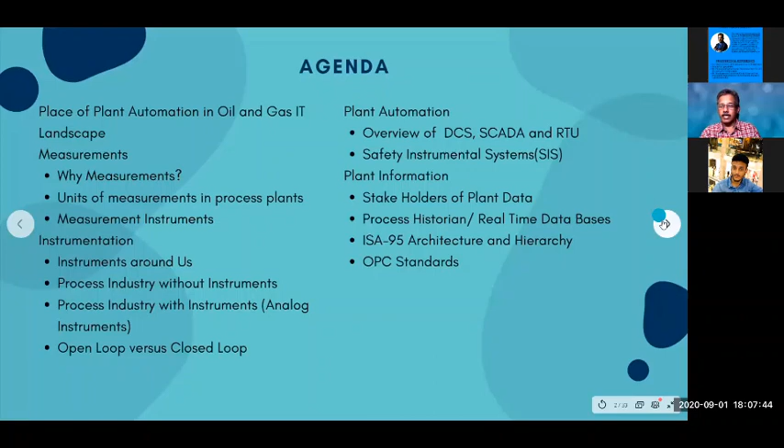I will also cover the overview of DCS, SCADA system, safety instrumented system, and another important layer called the plant information system. So this is how I have divided my session today. That is going to be the agenda. If you see this landscape here, this is predominantly what we are going to cover in the next 7 days.

So the entire IT landscape is divided into 5 major layers. The bottommost layer is known as the plant automation layer. It comprises of control room automation, field instrumentation, plant automation systems like DCS, SCADA, or even today's mobility solutions for field automation.

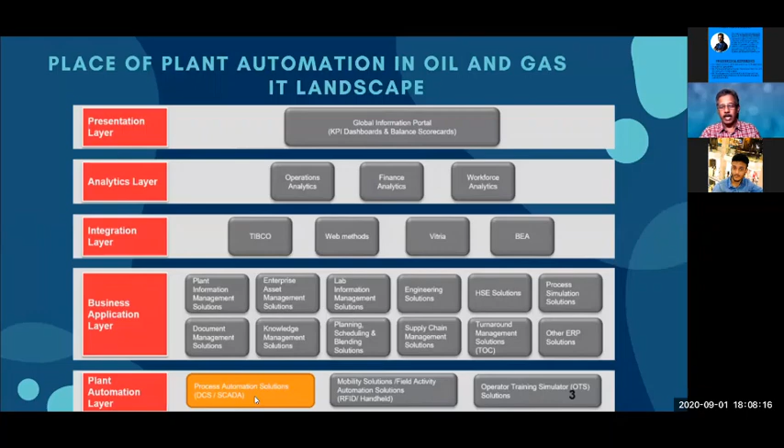Then the next level is known as the business application layer. These are generally data specific applications like asset management solution, plant information system, lab information system. They are all more specific to database kind of applications, whereas plant automation system is totally a different animal.

Then we have the third layer where we are trying to integrate all these applications with the help of tools called TIBCO, Web Methods, Vitria, etc.

And then we move on to the analytics layer where the business head, for example, the HR guy, will be doing workforce related analysis. How many people are chemical engineers? How many mechanical engineers? How many welders are there? How many certified welders are there?

This kind of analytics. Or when you talk about operation analytics, where exactly am I losing money? Which plant is giving me the maximum profitability? Or finance related analytics - what is the cash flow, what is the budget available, how much money I have spent. So all that kind of analytics is happening at a unit level.

But the final layer is the business portal or the key KPI dashboard. That is where the GMs, director operations, will not be bothered about the plant temperature, pressure - generally those things are taken care of by the technical process engineers. But the top management will be more interested in knowing the crude throughput, how much more profit you are generating, what is the availability of the equipment in the plant. So they are seeing these kind of KPI.

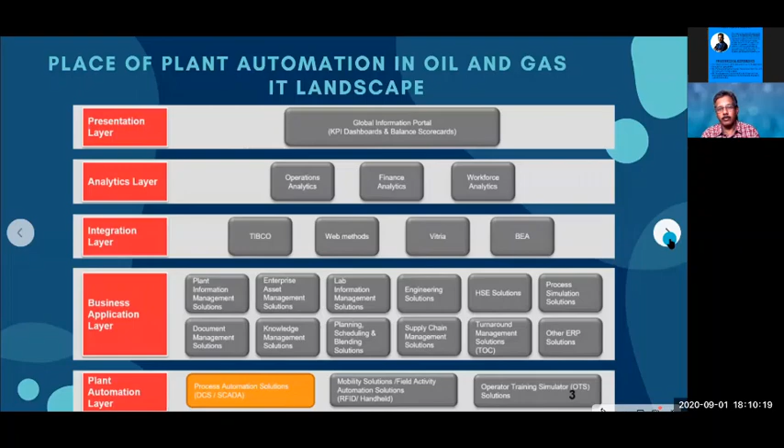So now we'll start with measurements. In a plant, we have pressure, temperature, flow, level - several parameters are measured, and to measure that we use instrumentation. Before getting into instrumentation, I'm going to talk about measurements. Can you all type in what kind of measurements you have come across in our day-to-day life?

In terms of health, what are all the different kinds of measurements we have? Personal health.

I just want to set the context before jumping into the jargons and terminologies. So we have 45 people and only one person has responded. I want you people to switch on your video and interact. If that is not possible, at least type in and respond to my questions. Otherwise this will be like a monologue and it will be boring.

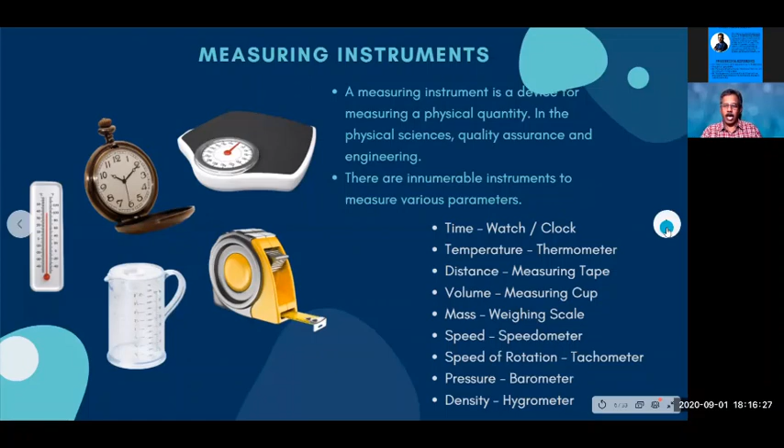And these instruments are available in our own house. For example, you have a fan regulator. Then in your bathroom you have a thermostat, which adjusts the temperature of your hot water. Then if you have old parents, many of your parents may be using a glucometer, right? Glucometer is to measure the sugar level in the blood.

Then when you call an electrical technician to attend some electrical issue, he comes with a multimeter to check the connectivity and measure different parameters. Then we have odometer, speedometer, the oil level gauge in your two-wheeler or car dashboard. To measure your car tire pressure, you use a small pressure gauge, either at your own garage or at the air filling station. Then your fridge has the thermostat, viscometer - that's good.

But when we come to process parameters - not only with respect to a refinery, but petrochemical plant, gas plant, any process plant - there are 4 parameters which are very important. These 4 parameters determine the entire operation and finally the quantity and quality of your end products. So what are these 4 parameters? Number 1: flow, temperature, pressure, and level.

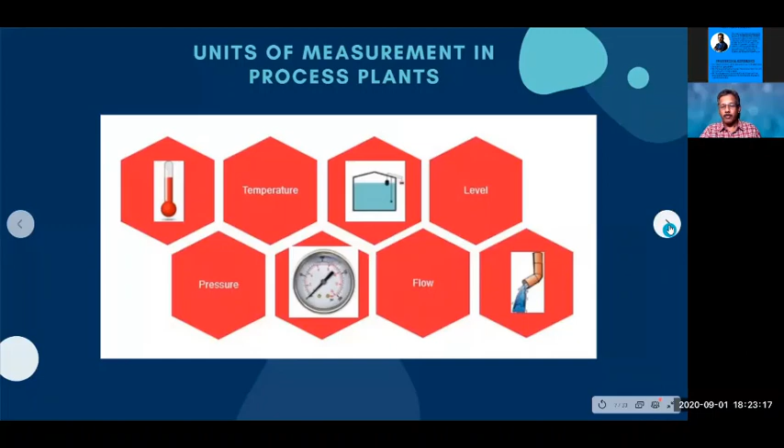So we know the primary fundamental parameters that are monitored. Again, I would like to reiterate: flow, level, pressure, temperature. Beyond that, we will also be monitoring air emission, density, moisture, vibration, etc., depending on the need and context of the unit. Is that clear? Can I move on? Right.

Can you respond? Are you hearing me a little late because of internet connectivity, or making alcohol?

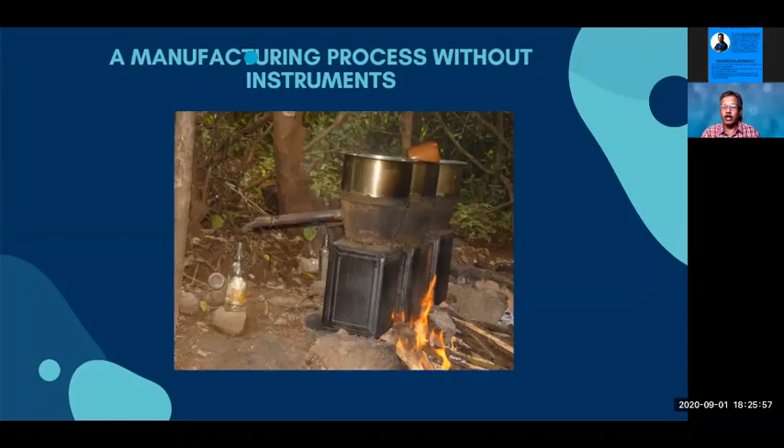So in a process plant, by experience you may know what flow is going at what level you are maintaining, but without instruments it is very difficult to do continuous operation. So I am just showing a very simple process.

Just a minute, I am getting a call. I am not sure whether it is from one of you. Hold on.

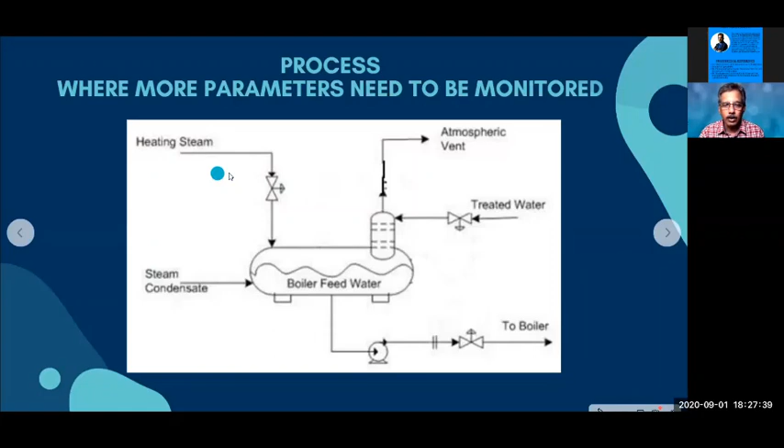So this is a continuous process. Water is continuously coming in, continuously taken to the boiler, steam is continuously coming in, and some gases are venting out. This is a process where different parameters need to be maintained. I want to measure the flow of the boiler feed water every minute. I want to monitor the boiler feed water level in the drum, because if the level falls below 5% or 3%, the pump will start cavitating. So I need to continuously monitor the level of the boiler feed water drum, and also monitor the flow of boiler feed water to the boiler, because that determines the steam I am going to produce.

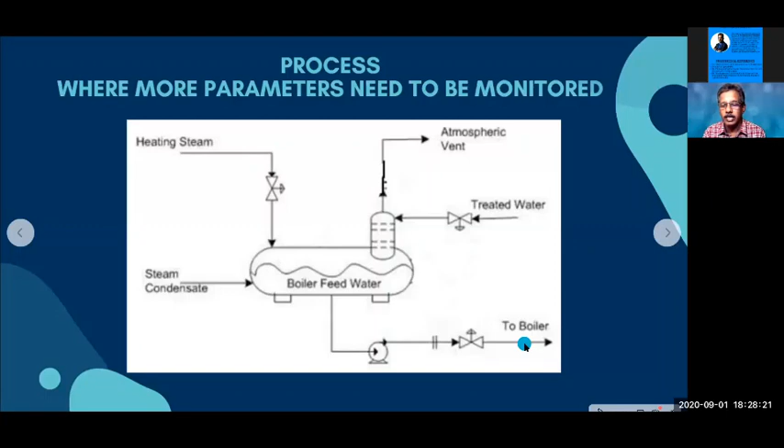For example, like as I said earlier, so now the plant was running at 100 meter cube per hour, and all of a sudden there is a disturbance, and the flow increased to 110 meter cube. So earlier the PV was 100 and control room operator set value was 100, and the valve was opening at 60%. But now the flow has increased from 100 to 110 meter cube, but the set value remains 100 meter cube. So now there is a small delta.

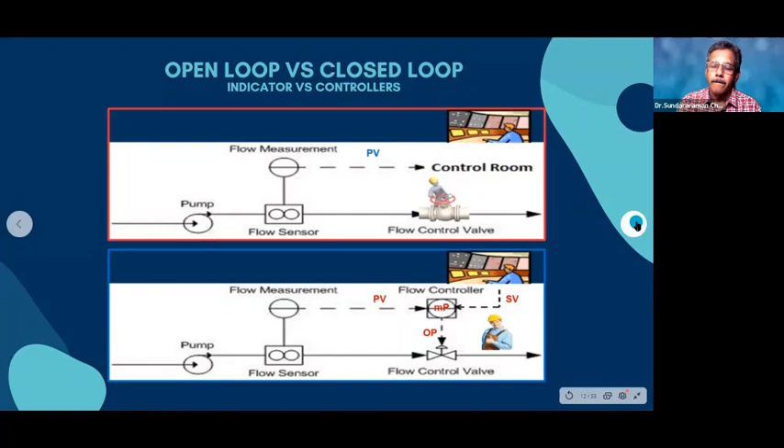Right, we'll move on. So this is, as I said, in a plant you will have flow meters, pressure, everything will be there. And we have two sets of manpower here. One person who is sitting in the control room, known as the control room operator, who is equivalent to a pilot in an aircraft. So he is generally an experienced person.

Most of the plants, either the academic background will be a diploma holder or a BSc graduate, or sometimes they put a chemical engineer or a BSc chemistry graduate or a diploma in chemical. So these kind of background people go there, but definitely a control room operator will be an experienced person, at least who has worked in the plant for 5 years or 7 years or 10 years.

But whereas the field operator is a relatively inexperienced person, and his job is to ensure that all pumps are working properly, whether any abnormal noise is coming, whether the cooling water flow is proper, the lube oil level is okay. So these kind of routine checkups he will do, and he will also note down certain instrumentation readings in his log book. But today, these paper-based logbooks are slowly being replaced with the help of mobile devices.

So these are some instruments which are not directly connected to the control room. They are all slightly trivial instruments, but definitely we want these readings also to be recorded. So that is the job of the field operator.

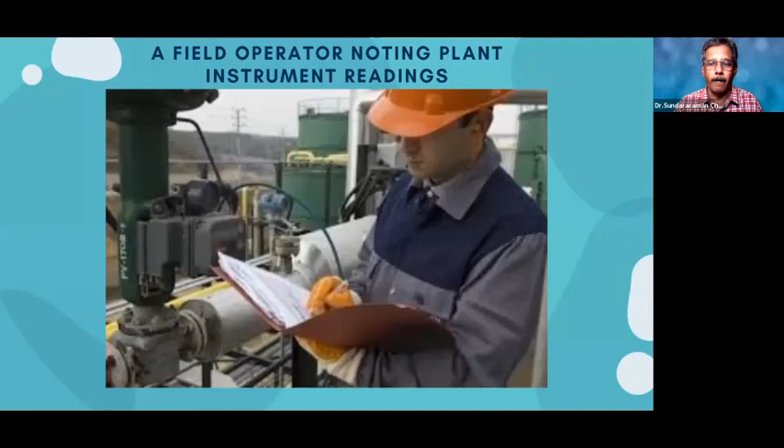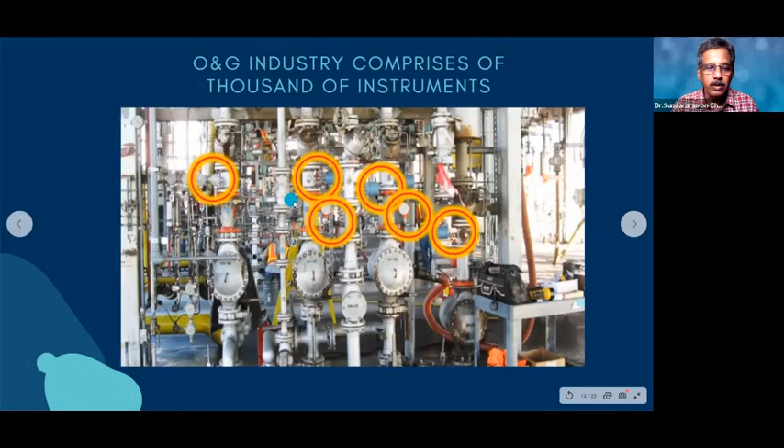And if you see the plant, as I said, it comprises of thousands of instruments. For example, in a refinery, an ordinary refinery will have at least 1,000 instruments, and out of 1,000 instruments, maybe you will have 200 controllers and 800 different other instruments, indicators and kind of stuff. And each loop has got a sensing element, microprocessor, final control element, etc. So this is a pictorial representation of different instruments shown here.

Most of these instruments give inputs to the control room. Whether you operate a refinery, a petrochemical plant, or a nuclear or steam-based power plant, these instruments are connected and the final indication comes to the control room.

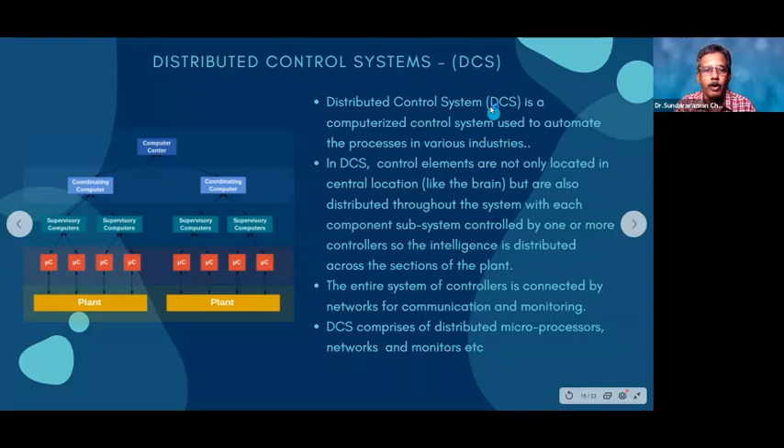We have the field instruments, the indicators, the microprocessors, then the supervisory computer, and between every two supervisory computers we have a coordinating computer, and finally all this culminates into the control room. The control room is like a nerve center or brain center, from where everything can be monitored.

With the help of special monitors, similar to how we see different things in our computer system, but here the display system is slightly different, and you have special keyboards through which you can see the complete performance of the entire plant.

In a complex refinery, the entire process plant is divided into small units, which are part of blocks. For example, you have the crude block, hydrogen block, and lube block. Under the lube block, you will have a hydro treating unit, dewaxing unit, and furfural extraction unit.

Under the hydrogen unit, you will have hydrogen manufacturing and hydro desulfurization. This is how the hierarchy is structured. But all the plants come to one single control room, and within the central control room you have multiple DCS systems.

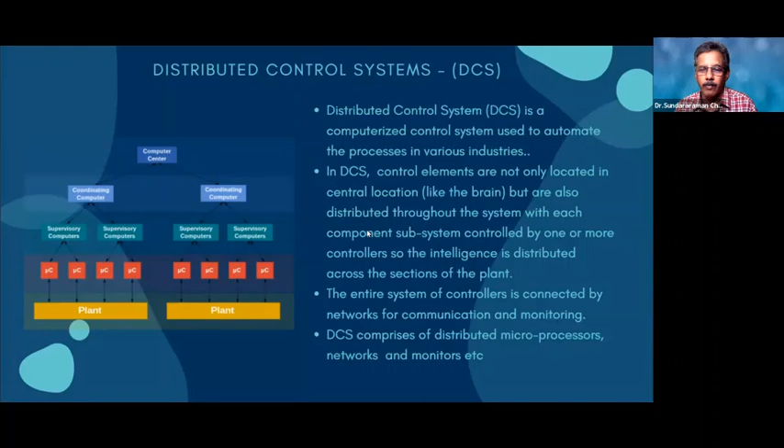I'm just giving an example number, three different DCS systems. Depending on the number of units, the number of DCS systems will vary. A complete network and cohesive system is known as a DCS system, and this is how a DCS-based control room will look.

Has anyone had a chance to work in a refinery or any process plant control room, or visited one during an industrial visit? If so, type in yes. I want to ask you some questions or get your feedback.

Vignesh, you visited. Which plant did you visit, Vignesh? You were in Bahrain. Was it a gas plant or a refinery? Were you working there or did you just visit? A gas plant. Was it a visit?

You were working there. Can you unmute yourself and give a quick overview of the DCS control room, based on your experience at the gas plant? What kind of DCS system was there, Honeywell or Yokogawa, and how long were you operating there? Share your experience in 2 minutes. Unmute.

Just a second, sir, I'm unmuting him.

More than me talking throughout this session, I would like to hear from the participants. When you hear from your own peers, the learning will be more powerful.

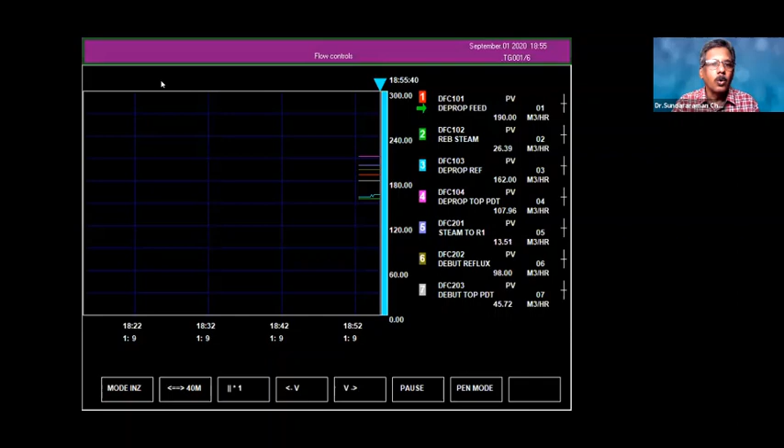Then I have something called the group page. This is called the control group page. All the controllers are properly grouped, and you will have multiple such groups. Suppose I have 100 controllers, then I'll have some 10 or 15 group pages. This is the trend page. Then this is the graphical page.

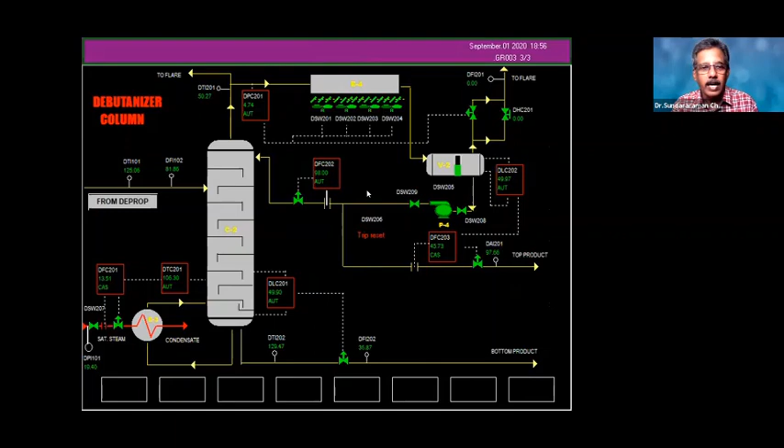Now I'll give a problem here and see what is going to happen in the plant. I'm going to stop one of the pumps, and all of a sudden you will get all the alarms.

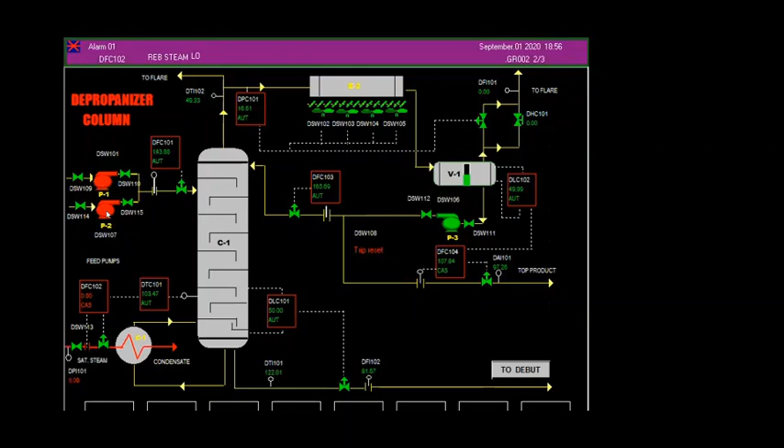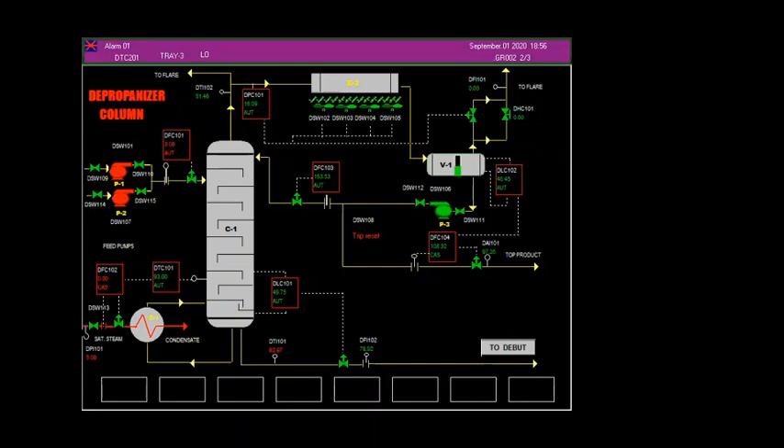Yes, sir. So whenever there is a problem, immediately an alarm will come, and then you have to go to the alarm summary page.

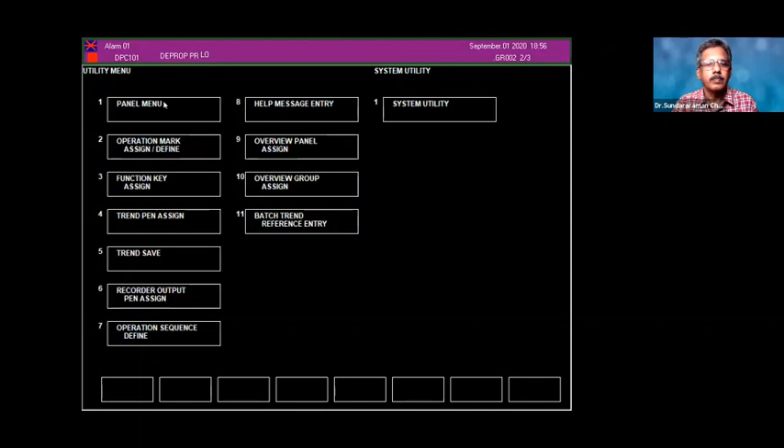So yeah, because I stopped the feed pump to the entire unit, now the entire plant is going into shutdown mode, and alarms will start coming in. So as a panel operator, you are supposed to go to this page and find out the root cause that has triggered all the alarms, so that it can be corrected.

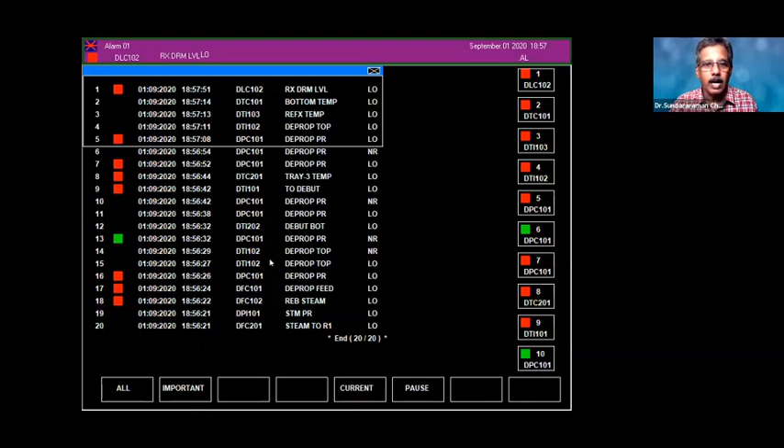In this case, what he is supposed to do is inform the field operator that the pump is tripped. Normally, when critical pumps are tripped, immediately the standby pump will get started. So now I have to acknowledge all these alarms, and I will put the plant in design mode.

Silencing button is not working. Yes, now it's okay, it is coming back to normalcy. See here - in the last 5 minutes, I stopped the pump, and it caused all kinds of upset, which is evident on the trend panel.

So the control room operator's job is - yes, go ahead.

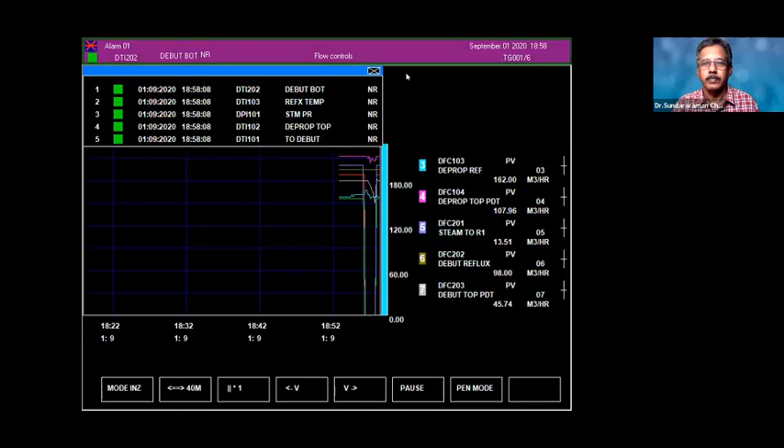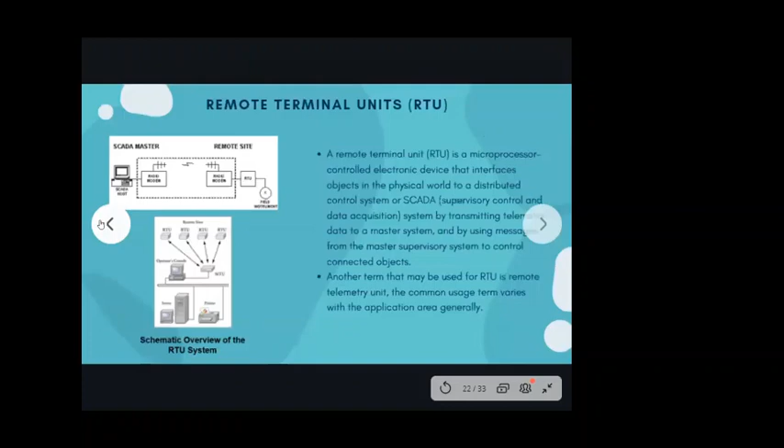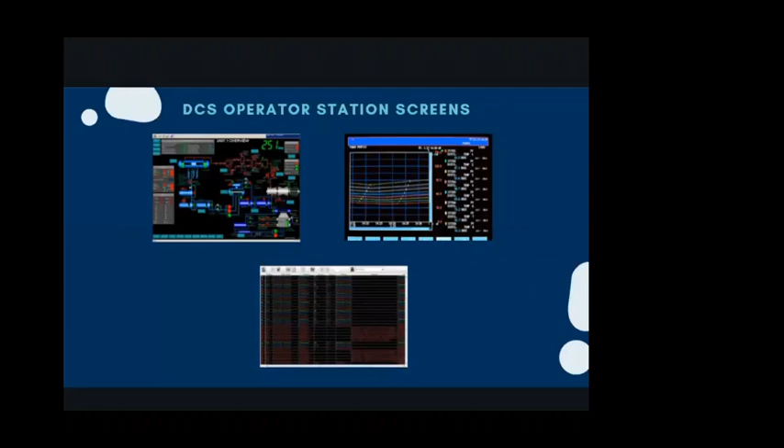Sir, your voice is breaking. What is it? How is it now? Is it fine now? I think since the simulator was running... that's why, sir. You can close that one, sir. Yeah, I have closed it. Now is it clear? No, sir, background sound is there. Is my voice still not audible? How is it now? The background music is coming, sir - some speaker. So Nikhil, you have to mute everybody, not unmute. You have unmuted everybody, that's why there's disturbance. Oh, not from me.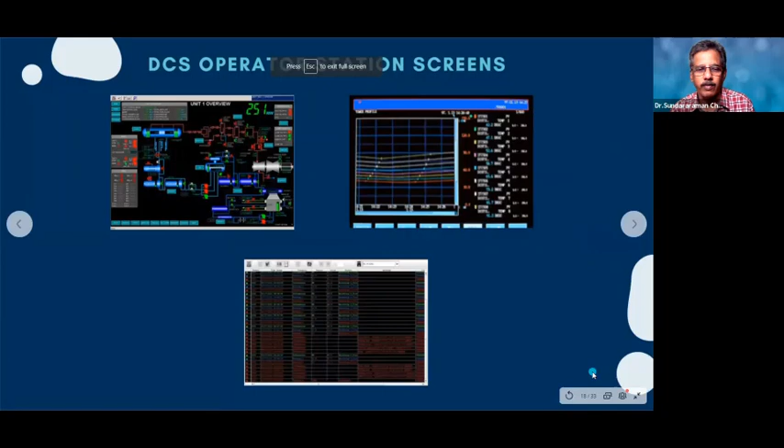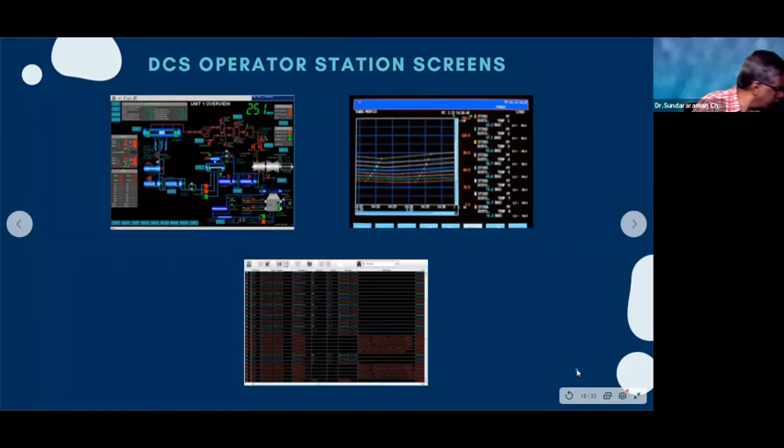Am I audible now? No, sir, background music is coming. It's not from me. What music? What kind of music? Everyone is already muted, so what kind of music are you getting? Sir, once you reduce your microphone volume. Maybe the headphone. Coming, sir - echo. Hold on. How is it now? No, sir. Is it okay now, good to go?

So these are all the different kinds of pages by which the control room operator controls the entire plant operation. Theoretically, once a plant is running properly, everything should work fine. But in reality, there will always be some disturbance due to upstream disturbance, downstream disturbance, or utilities giving some problem.

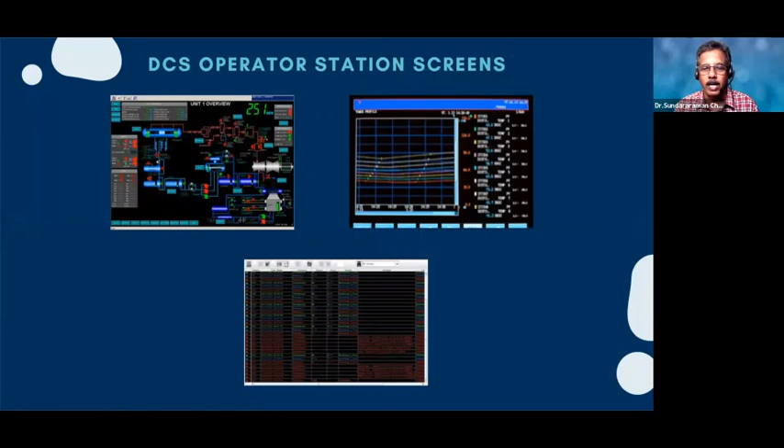So you have to constantly monitor and take corrective action. It's like how a pilot puts the flight in autopilot mode for some time, but when landing and taking off, he has to maneuver and take correct action. Same is the case with the control room operator - whenever there is some disturbance or emergency, he has to use his knowledge and experience.

And this is a modern control room. So can you see some difference between what I showed previously and this modern control room?

Mohammed, can you mute yourself?

So now you are seeing the picture of a modern control room. How is it different from what I showed in the previous picture? Can you see some difference? You want to see the previous control room? I will show you once again. Okay, this one - the difference between this and this.

Background music is coming, sir. What music here? I am unable to know. Is it cine music or that alarm sound? What is it? Unless you explain, I am unable to understand. Is it coming from my system?

Hello. Yes. What music? Sir, once you join again, link. If possible, tell me what kind of music you are getting. Like what is doing, sir? That alarm sound? Okay. No, sir.

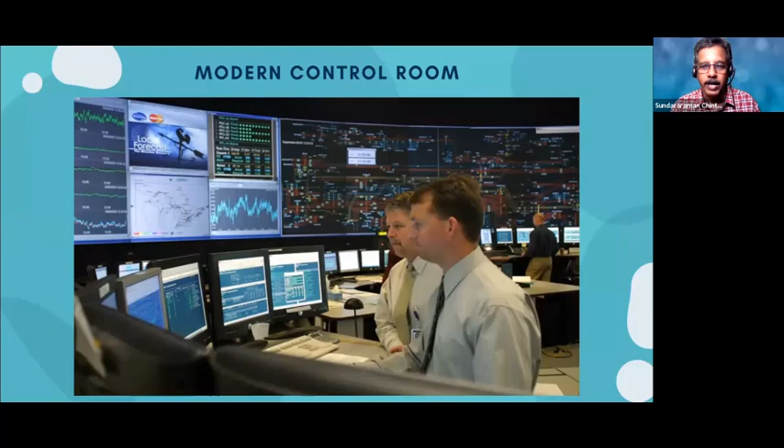Not only that, you are able to see weather forecast, third party systems, because like operating a gas plant or refinery, you should know at what point of time storm is coming. So all that you should be aware of, and accordingly either you have to shut down the plant or run the plant at lower throughput. So this is how the modern control room is slightly different.

So then whatever we had discussed, it is all about DCS. We have something known as SCADA system. SCADA stands for, it's an acronym, Supervisory Control and Data Acquisition. It is almost like a DCS.

SCADA systems are predominantly, this is also a combination of field instrument, sensing element, control valves, but predominantly it was used for some repetitive action. For example, you have some cylinder filling system, your yard management, where some kind of mechanical activities are there - that is where SCADA were used. Or in a small scale plant like water treatment plant or city water distribution, that is where SCADA were used.

Earlier, probably 2 to 3 decades back, SCADA were different and DCS were different. But today, SCADA and DCS almost have merged, because all SCADA manufacturers started manufacturing DCS. But generally, when you go to a refinery, the process plants are operated using DCS system, and the peripheral plants are operated with the help of SCADA system. But in principle, both of them are almost the same.

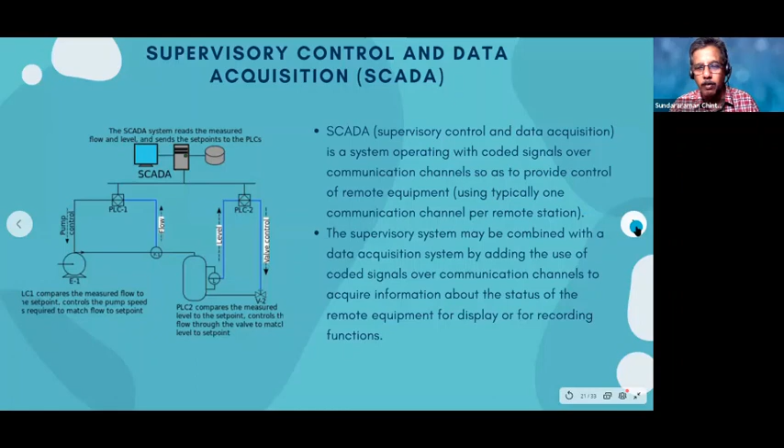Then we have something known as remote terminal units. Remote terminal units are primarily meant for your gas plants in an island, or you have a water treatment plant or water purification plant which you want to operate from a remote location. So in a refinery, the plant is in the refinery, and the control room is situated inside the process plant.

Whereas certain plants, for example, you have multiple water treatment plants, multiple water distribution system or gas distribution system, which you want to operate from a remote location, from the headquarters you want to remote - that is where we are using remote terminal units. So they are all part of SCADA or DCS systems.

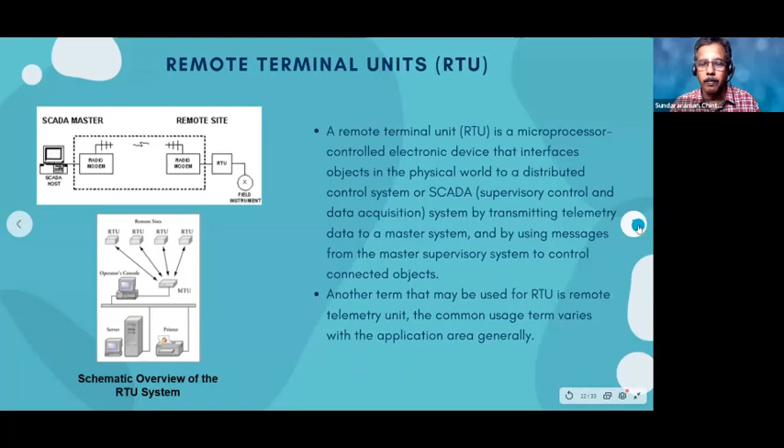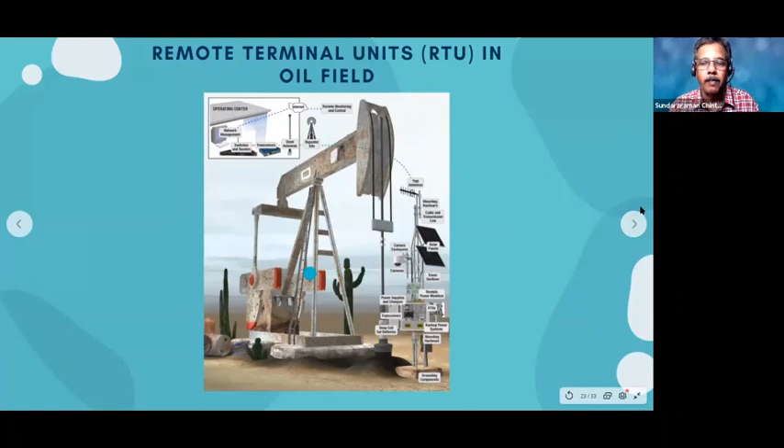So for example, this is an RTU in an oil field. Each of the different kind of instruments are located in different parts of this donkey well, donkey pump. Then we have something known as safety instrumented system.

So predominantly safety instrumented system, SIS, comprises of programmable logic controller and emergency shutdown systems. So why I want to highlight about this is also having instruments, sensing instrument, shut off valves, and logic controllers, which are also present in the DCS system. But generally, when a project is given to an automation vendor - a refinery is being constructed, Indian Oil is constructing a refinery - then the automation job is given to Honeywell.

The safety instrumentation job will be given to a third party, because it is not given to the same party who are implementing the plant automation system, since the third party will have more focus towards this. Third party means another company.

So primarily, for example, I was talking about the boiler feed water system. When the level comes below 5%, at any time the pump can get tripped. So in that case, the boiler will starve and then the boiler tube may get punctured. Yeah, safety accident can happen. I don't want that to happen.

So normally the DCS control room operator will take action when something goes wrong. But when something goes beyond his control, for example, when the level falls below the threshold limit, then the pump has to be stopped.

The burner has to be stopped, and the pressure relief valve system should be open. This is all possible with the help of a programmable logic controller. They can be programmed offline by instrument engineers. So at 50% it should generate an alarm, at 40% one more alarm, and at 30% level it should trip the pump. That's how I can program it, and I can reprogram it at any point in time.

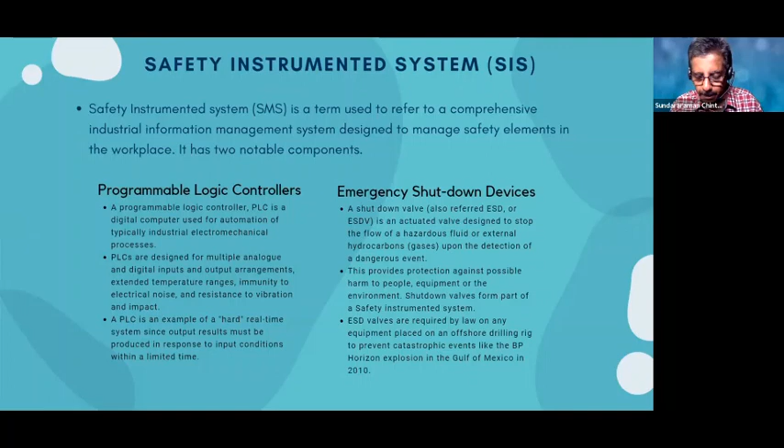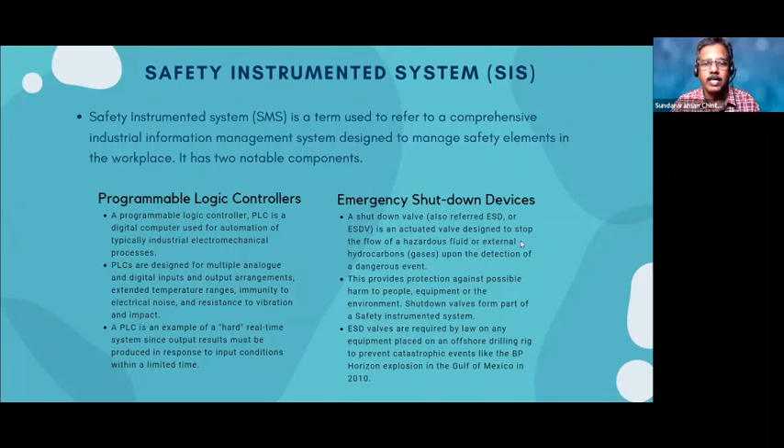Are remote terminals and remote telemetry units the same? Yes, both are same, just different kinds of terminologies used. Remote telemetry means anything remotely controlled. So both are same, depending on the context or depending on the company, people use different terminologies.

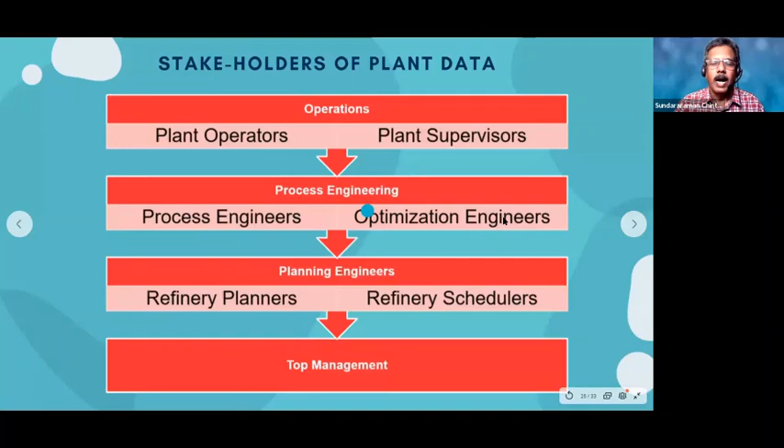I discussed in length about instrument measurement, but the overall concept of this entire 7 day program is all about IT for oil and gas. How is today's session relevant from that context? Whatever information is provided by the instrument is consumed by different stakeholders. Whatever the instrument readings are, that's also one kind of data. When we talk about data, it can come from ERP, like sales and marketing related data, or it can be lab data, or maintenance related data, which I will cover tomorrow. But today the focus is on plant data.

Plant data is consumed by plant operators and plant supervisors to run the plant smoothly, and by process engineers or chemical engineers. For process engineering purposes, they want to know what is happening inside the plant. Every process engineer is responsible for the health of the plant, whereas the plant operator's and supervisor's job is only for 8 hours. As long as the plant runs smooth for those 8 hours, that's all, they'll go back and relax. But the process engineer is answerable for the plant performance for the next 1 to 2 years, so even when at home, he will be thinking about the plant.

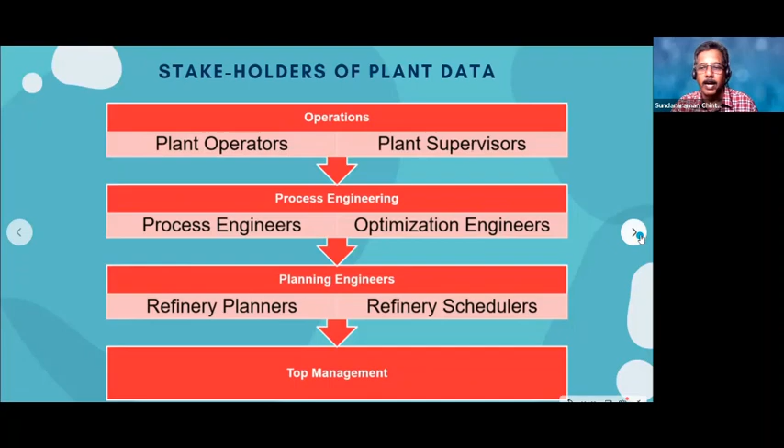Each group has got its own requirement from the plant data, and generally the process engineer comes to the control room and collects all the information, talks to his team members, and jots down all the readings. But this was happening almost three decades back, that's how they used to come and collect all the data.

But today, with the help of a system known as Historian or real-time database, all the plant parameters are stored in a very big database where the data is compressed using a special algorithm, and that compressed data can be consumed by anyone. So who is providing such kind of services? A company known as OSIsoft. I think today OSIsoft has been taken over by another company, I forgot the name, it was in the news today. They have a system known as the PI system. Then there is a company known as AspenTech.

They have a product known as IP21. And all the DCS vendors, the plant automation vendors also have Historians. So Historian is a database software application that logs all data.

With the help of Historian, I can go back and find out what happened. For example, as a process engineer, I work only 5 days a week, whereas the plant operators work in shifts all 7 days. So I come back on Monday morning and feel something went wrong in the plant. Using historian, I can go back and move the cursor to find out all the disturbances that happened during Saturday, Sunday, or the night shift.

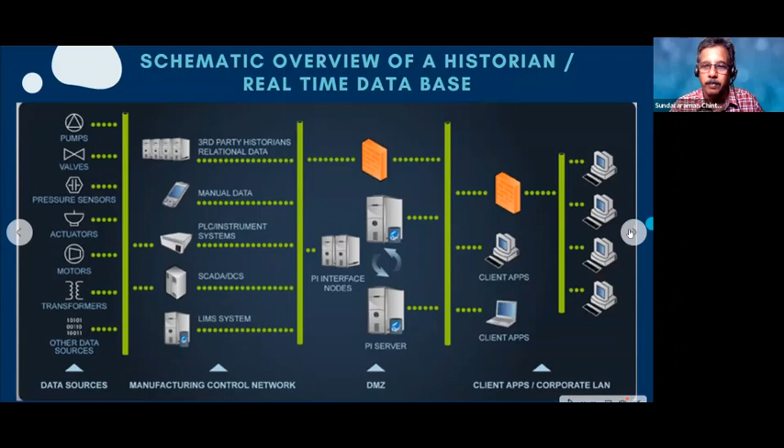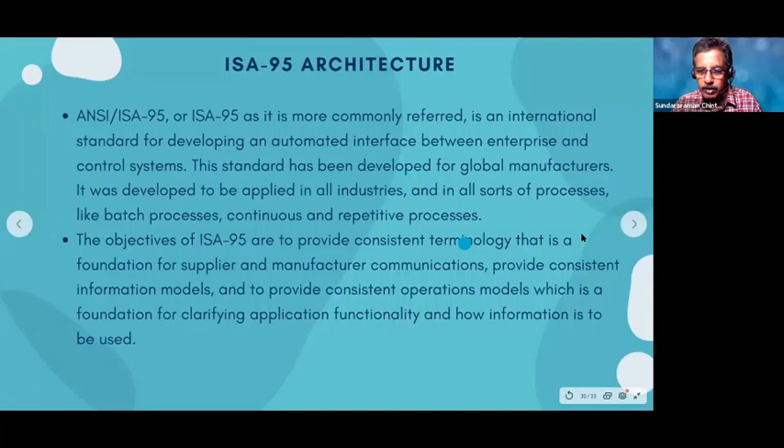That is possible. And when we talk about instrumentation, there is something called ISA 95 architecture. ISA stands for Instrumentation Society of America. I'm not going in depth about all the definitions, I'll share the slide deck later, but this is how the hierarchy looks - level 1, level 2, level 3, level 4.

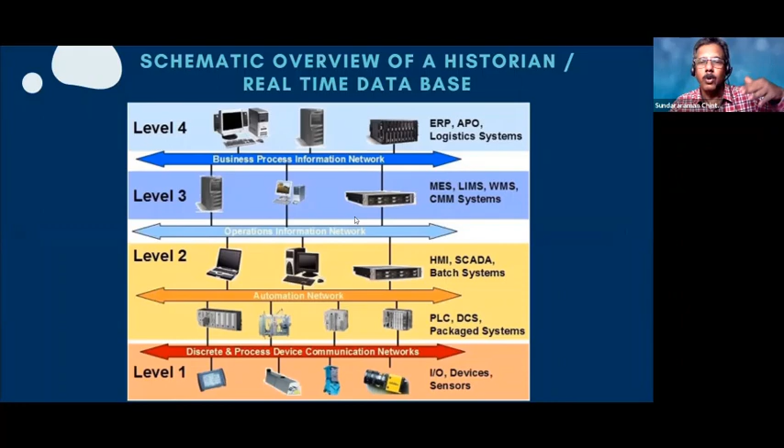Level 1 talks about all the field instruments, the small minute instruments. Level 2 is where you have PLC, DCS, SCADA kind of systems. Then level 3, we have applications like manufacturing execution system, laboratory information system, workforce management system, computerized maintenance management system, which I will cover in the next few days. All these business-level applications are in level 3. Then level 4, you integrate with the ERP and finally take it further.

The very first slide I showed about how the landscape looks like - almost the ISA 95 architecture is also in the same fashion. Generally, the plant automation guys like Honeywell, Yokogawa, ABB will work up to level 1, level 2, level 3. The IT guys like Wipro, TCS, Tech Mahindra, HCL, Cognizant, IBM, Accenture work on this layer and finally take the dashboard to the top management.

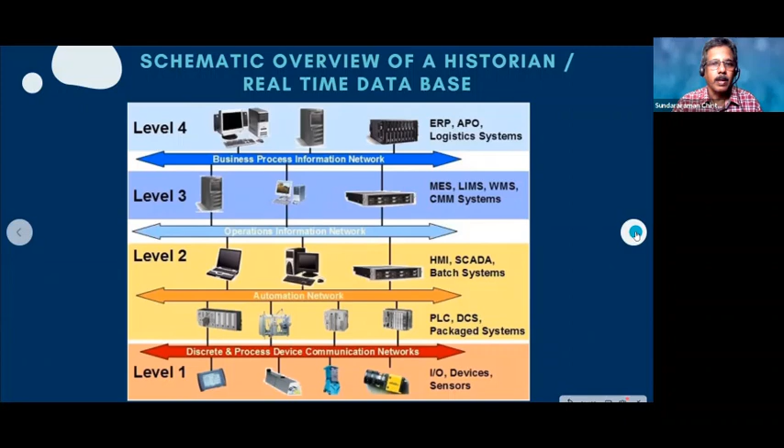And we also have something known as OPC standard. Just try to understand the terminology. OPC is a standard - you have multiple systems. Within a refinery, within one refinery, you will have multiple units, and multiple units have different kinds of DCS systems. You may ask why - if you had the same system, the cost would come down, right?

But still they will have multiple systems because they don't want to have monopoly. So an entire refinery may not have a Honeywell system - one refinery will have Honeywell, another will have Yokogawa, because every time you go for tender, whoever is bidding the lowest gets selected. So that's why you have multiple systems.

But if each system has different standards, it's very difficult to integrate. So that's where a non-profit organization came up with OPC standards, so everyone conveys in the same protocol. Using this protocol, it's easy to integrate - even with multiple systems, multiple PLCs, multiple SCADA systems, it's easy to integrate and finally build the integrated application.

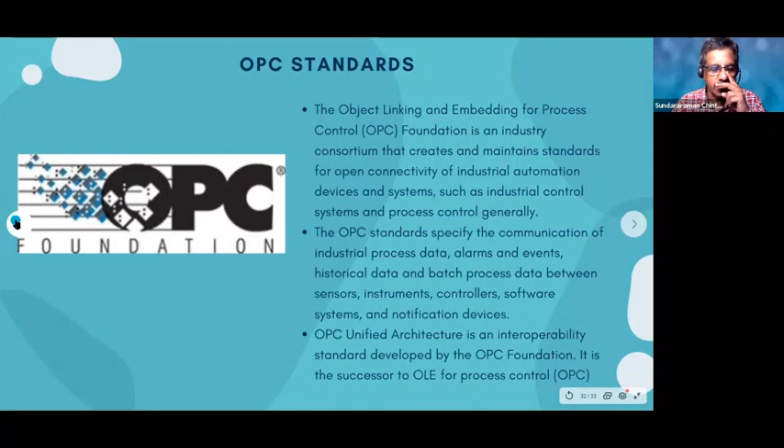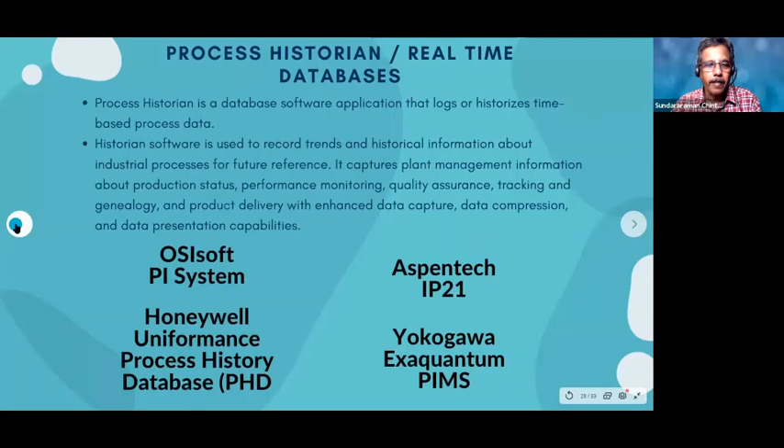So that gives an overview about plant automation system and plant information system. Primarily two major items I have discussed today: one about the plant automation system, predominantly revolving around the field instrument, SCADA, PLC, DCS, etc. Then the next one is about plant information system, where we talk about historian, through which the data is consumed by different stakeholders, and I also gave a lot of case studies and kind of stuff.

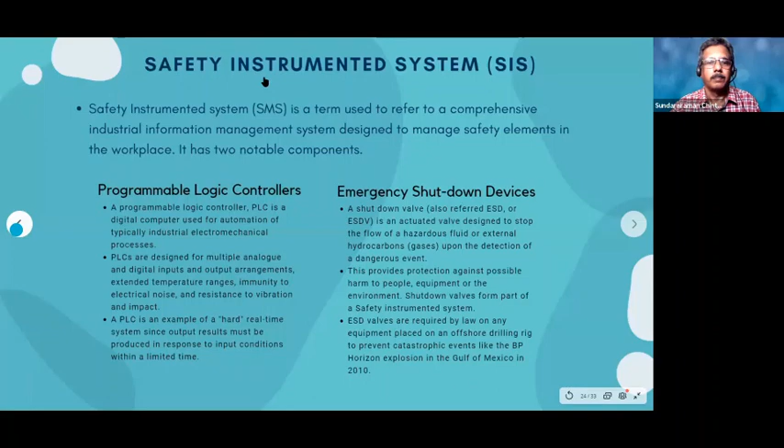With that, I'll take a pause, and for the next 5 to 10 minutes, we can reserve it for a question and answer session, or if you want to share something, you can share. Any questions so far?